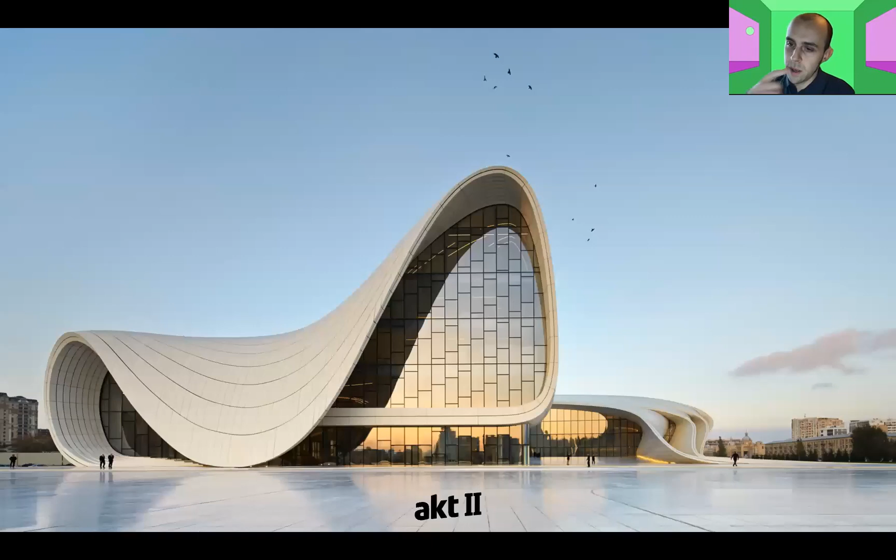Back to me for a few more seconds. I've been very lucky to be at the right place at the right time when I joined AKT II back in 2007, while the studio was designing iconic projects such as Heydar Aliyev Center with Zaha Hadid, and subsequently, for example, the UK Pavilion with Thomas Heatherwick. These are my all-time favorites. And with my team, I've been very privileged to be part of many larger design teams, meeting amazing people, and also learning many skills while delivering truly amazing pieces of engineering.

So the thing that really stuck with me the most while delivering this engineering project was the impact that data knowledge and manipulation can have on the final design. In this conversation tonight, we'll cover a few important lessons I've learned using some of our completed projects and research to hopefully help the discussion.

So the common denominator that unites us tonight is perhaps a shared curiosity on how technology and data are transforming our industry. And hopefully there'll be an interesting debate at the end of the evening, although I wish someone could set up a virtual pub because I really miss the post-lecture drinks and nibbles.

But anyway, technology really has already changed the way in which we move, we interact with people - we've proven it right now more than any other time before. The way in which we eat and we live. And it also changed the way in which we understand the world around us.

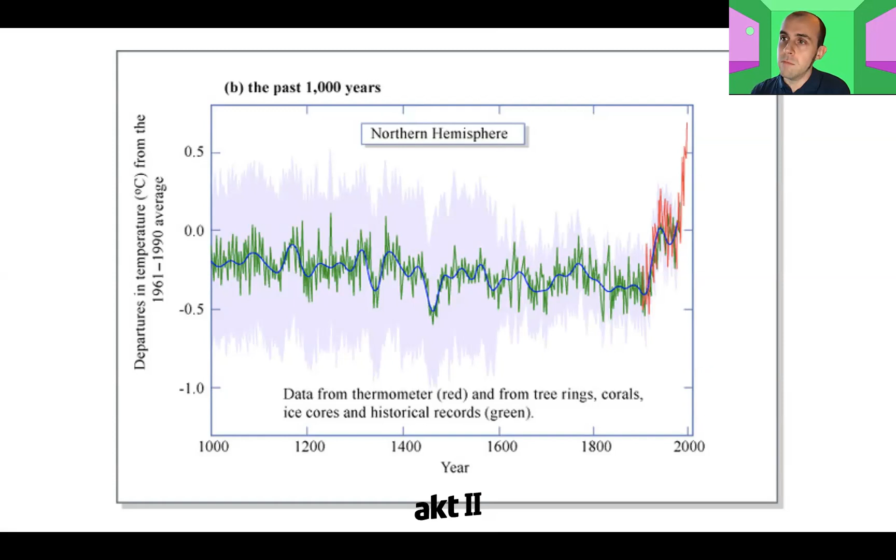Without data, we wouldn't be able to understand the existence of some problems, such as climate change. But also we wouldn't be able to track and potentially adjust some other problems, such as how different countries right now are trying to flatten the curve of confirmed cases of COVID-19.

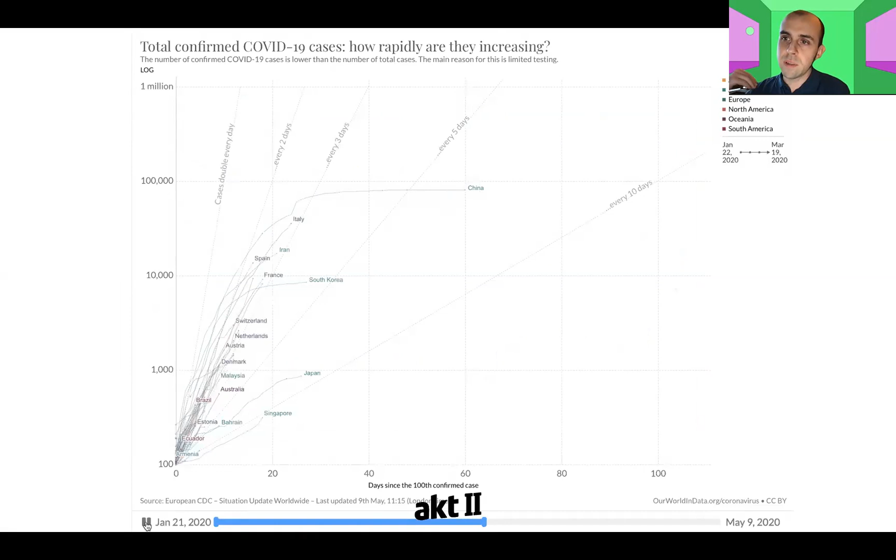So before going through the detail of some examples, I thought let's give a little bit of thought to what generates these shifts in usage of data and how they might impact our industry.

Obviously, under the engineering perspective, the data sets are linked to technology and to computing power. And there are three major laws that actually are ruling technology innovation. The first one is Kryder's Law, which is basically telling that disk drive density, or in small words, storage, doubles every 13 months - so storage increases. Moore's law, perhaps the most famous, tells us that the number of transistors doubles every 2 years, so there's a performance increase every 2 years. And obviously this impacts the time.

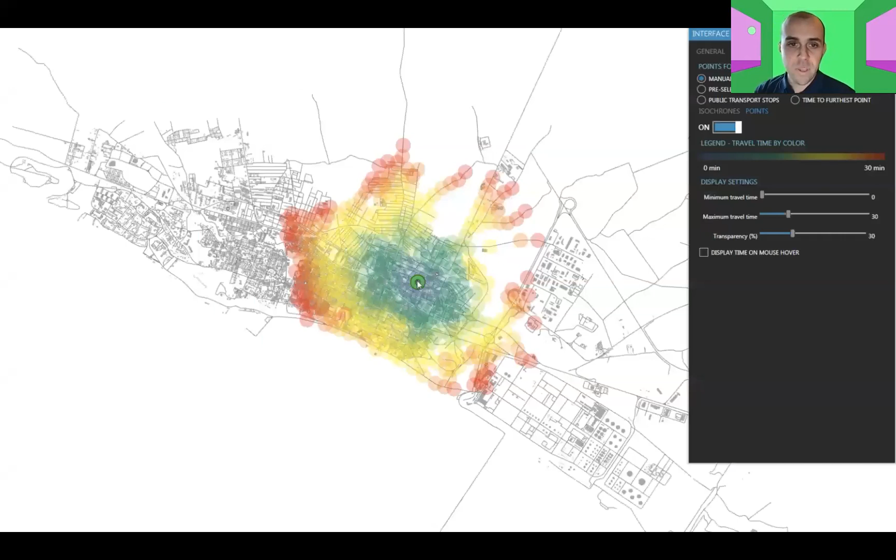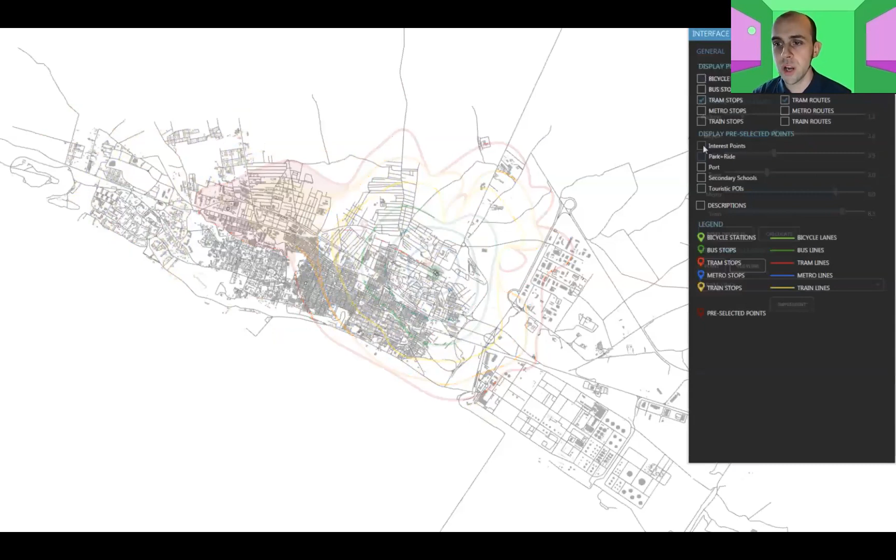They're very much up there, so I took a slide as an example. This is a study done in a city in Sicily. People mapped large data sets of the time for people to go from point A to B, using different means of transportation - walking, bicycle, car sharing, and things like that. They had to compress all this data and plot it on a system that would make use of the actual data set in the background, while also removing bias.

I think this allows us to think a little bit about what skills we might require to do these operations. So we need new skills: software developers, data engineers, gaming developers perhaps, to help us visualize and interact with these data sets. Also, we need new tools: interoperable software, database solutions, cloud storage, and cloud computing.

Large data sets are quite expensive in terms of storage, so it's a bit of an infrastructural change that we might have to face to be able to use these systems at their most.

Challenging, let's say. So the third and one of the most interesting things for me, as I tried to introduce in my initial slide, is bias - how to remove bias. There are many types of bias in statistical and data analysis, but I think one of the most interesting ones is survivorship bias, and there's a funny story to contextualize and explain it.

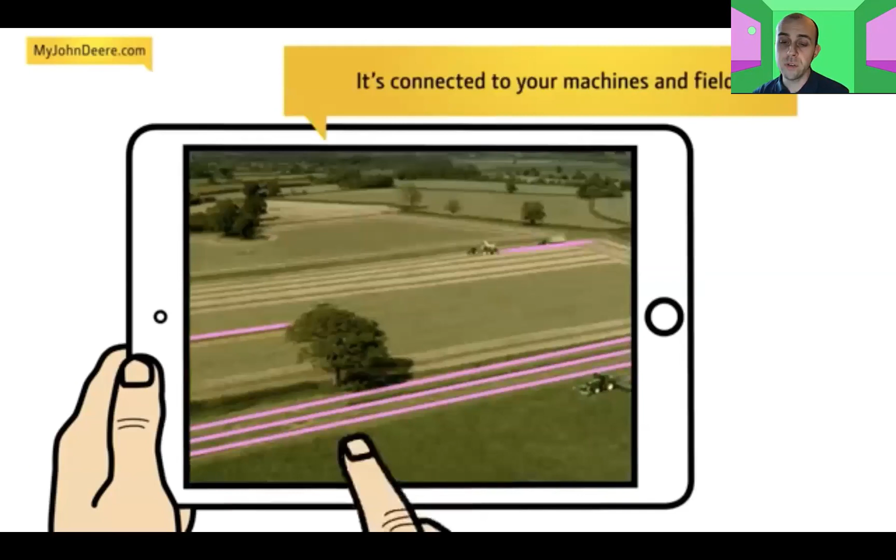So I guess one of the questions we might ask ourselves tonight is, can big data influence our industry? So I thought, first of all, let's have a look at other industries, how big data is already influencing them. For example, agriculture.

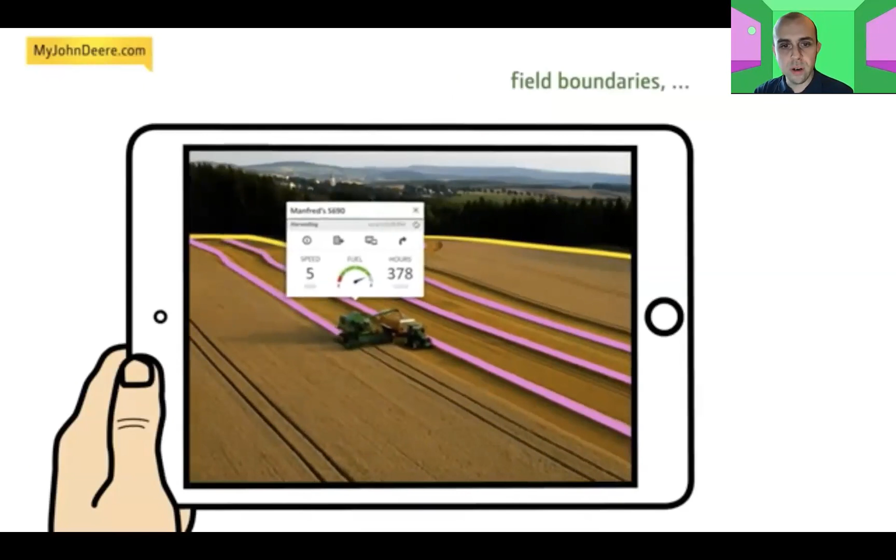There's a large use of data sets and data-driven crop assessment. This is an example from John Deere, applications which allow farmers to look at their crops in real time, looking at their machines in real time, their efficiency, what's going on, what's going wrong. It's all live and interconnected, and it's improving the efficiency of crops.

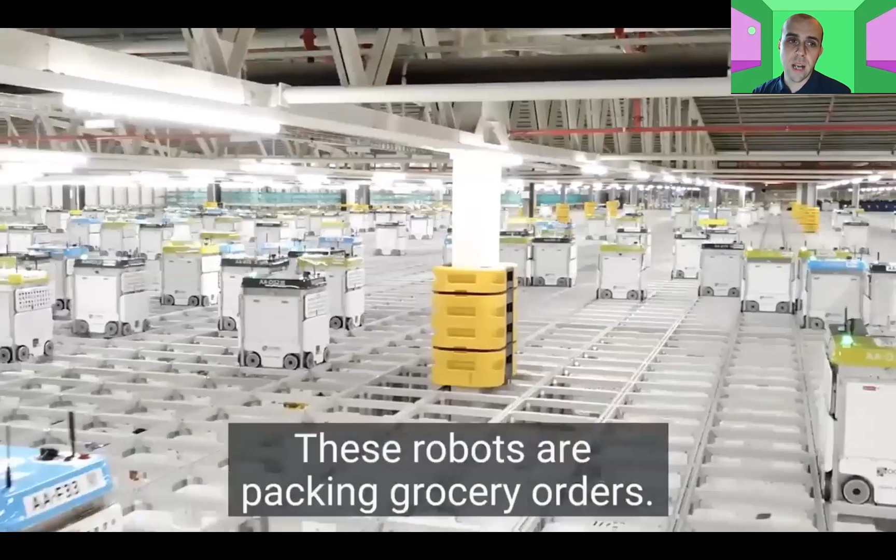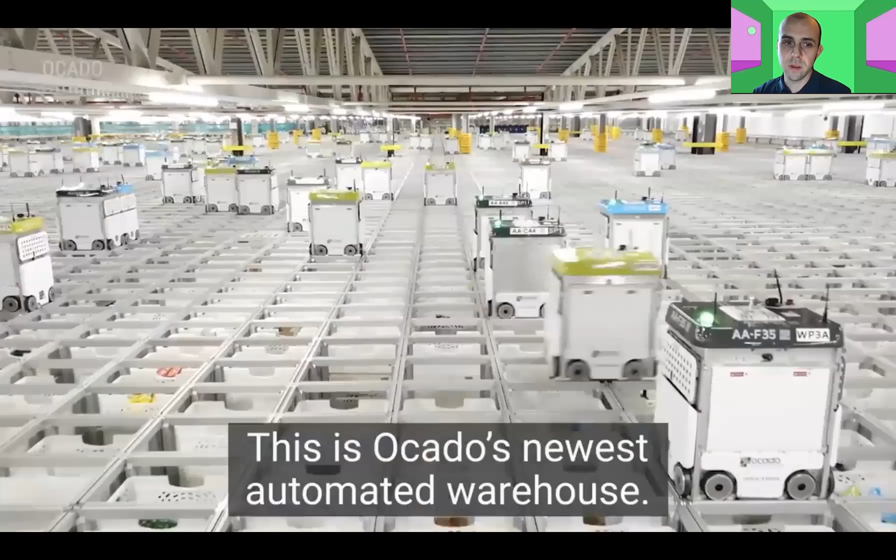Or even in other industries, in the consumer and retail industry, this is Ocado, one of the Ocado terminals for shipment of products. With interconnected, real-time positioned robots, Ocado manages to track their shipments and prepare them by fully automating and using robots instead of humans, which compressed the storage requirements, sped up the time, and has a lot of other benefits.

But for us, being designers, it's not about improving something that is repetitive and trial-and-tested. It's about trying to improve design, which we all know has got so many parameters around it, so many people, so many players. So let's have a look at how data can help us in design.

I'll introduce some of the projects that we've delivered at AKT using these systems, but just to introduce what affects design from our perspective, to me there are five different categories.

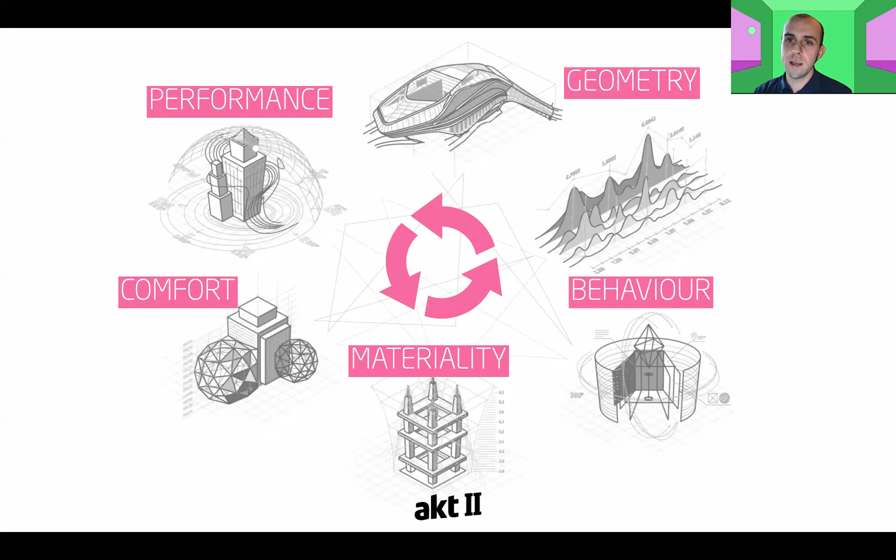So the way in which materiality affects behavior, the way in which behavior then affects geometry, and subsequently geometry affects performance and performance affects comfort. This is like a recursive process throughout the design that we have to try to manipulate and try to get external information into.

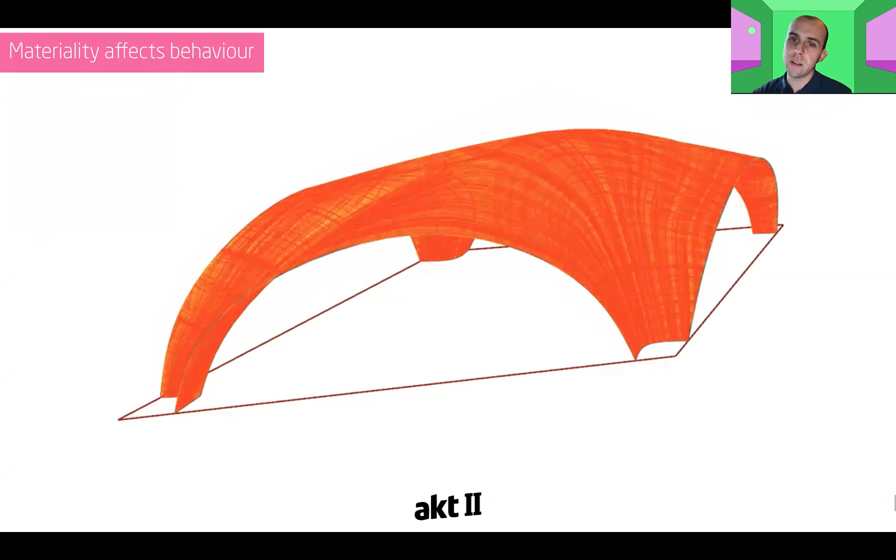The formal research we pushed at AKT in the past few years, applied to many other buildings, consisted in linking, for example, materiality to behavior. In one project we delivered with Zaha, looking at performance of concrete shells, we combined the performance of concrete to the behavior and changing parameters of the shell. We've been able to assess what would be the optimal conformation and the optimal material concentration in the shell.

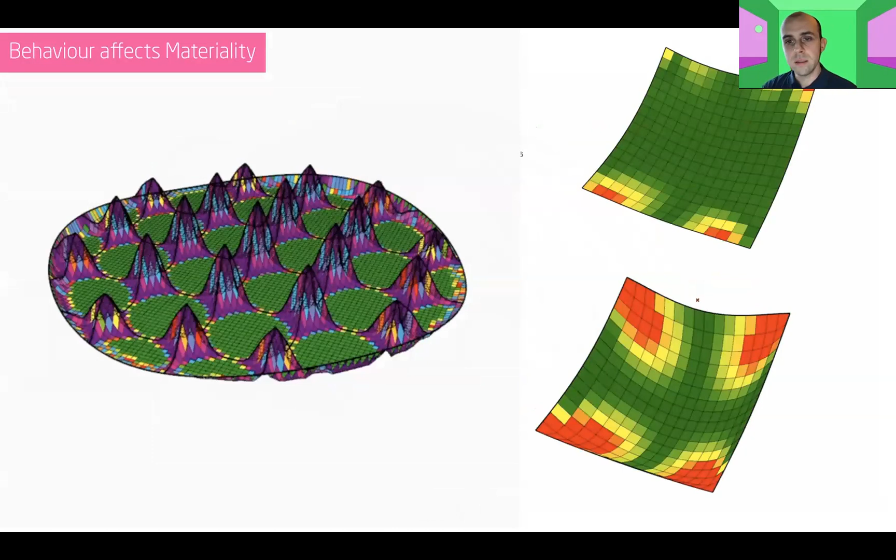But we also link how behavior affects materiality in reverse. In this case, we looked at how seismic actions would impact the glass skin on this large glazed dome, and we could tailor the material and performance to different specifications. We could see that the top seismic action and the bottom are the same, but with different structural parameters, the two structures behave completely differently. Dealing with large data sets here allows us to understand the impact of one action on the other.

But also how behavior affects geometry. This is a project with Bjarke Ingels in Norway, looking at a museum bridge spanning over a river - a very initial study here. We looked at how the behavior, in this case due to the actual position of the supports, affects the geometry.

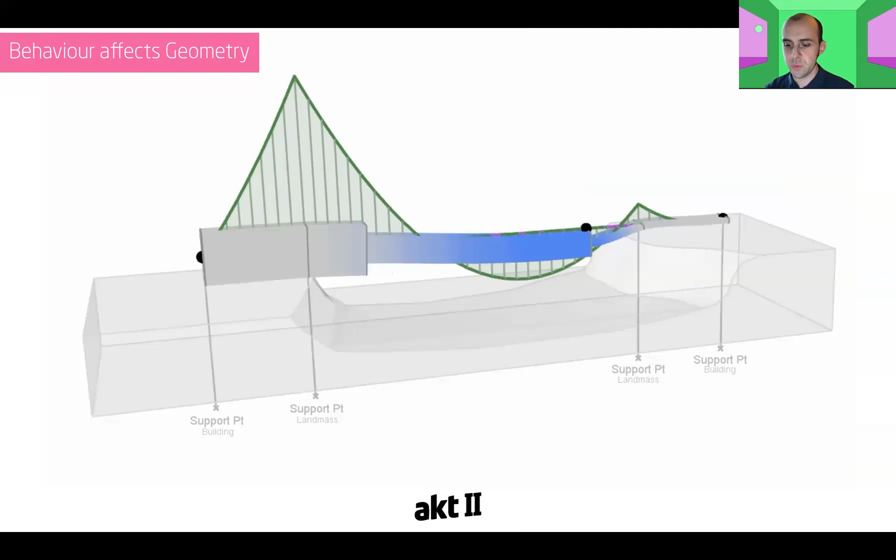And similarly, how geometry affects performance in this study of how varying the outriggers of a tower can help us reduce the displacement and therefore improve the performance of the core.

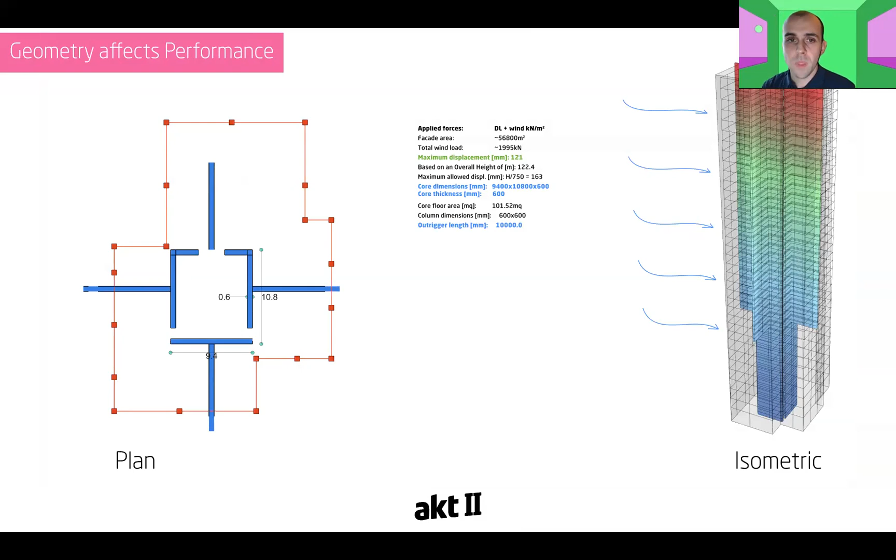Also, performance affects comfort somehow. So we have developed tools, which I will show later on, that allow us to understand the impact of our changes in design on comfort, which is also one of the aspects that we're trying to maximize in our designs usually.

So very quickly spending a couple of words on research - usually research is an exercise that looks at the past, where you're looking at understanding a specific problem through analysis. You start from a hypothesis and go through historical data to converge to a solution.

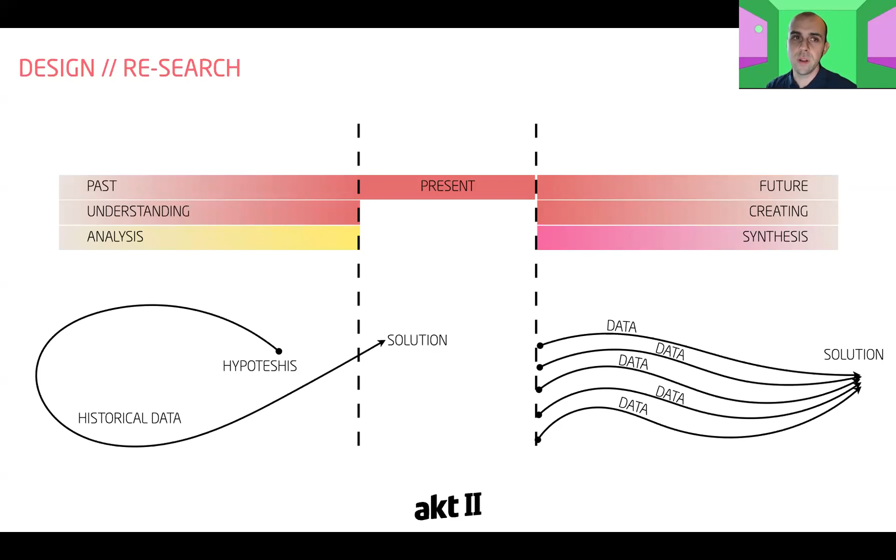But also look at the future - that's where the creative side comes in, being able to synthesize current data sets and create a solution that hasn't been solved or written before. The combination of those two things is what excites us at AKT, and especially in my team, the research we're pushing forward spans many different disciplines.

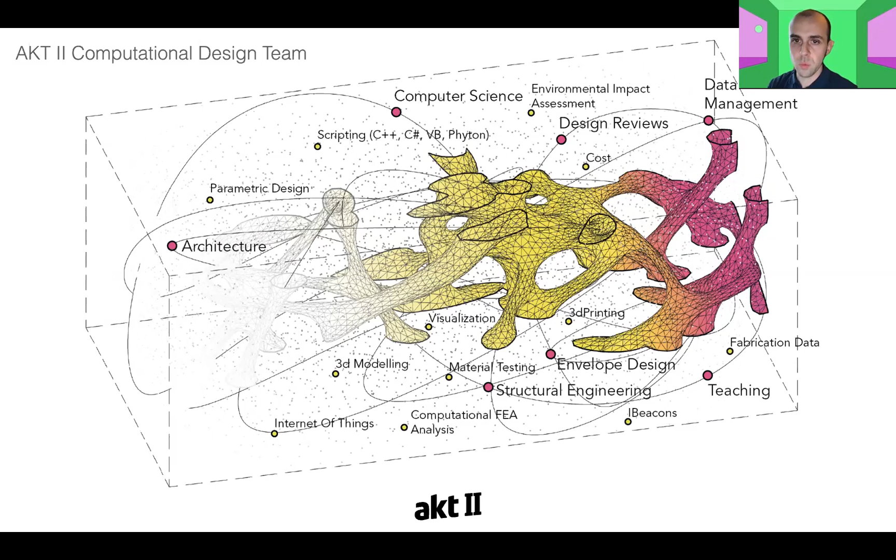Therefore we focus on computation methods applied to design, and look at developing interoperable tools that connect architecture, engineering, environmental design, and fabrication, because we obviously cannot do this on our own, and lots of the parameters we're willing to change reside in other realms, so we need to work together.

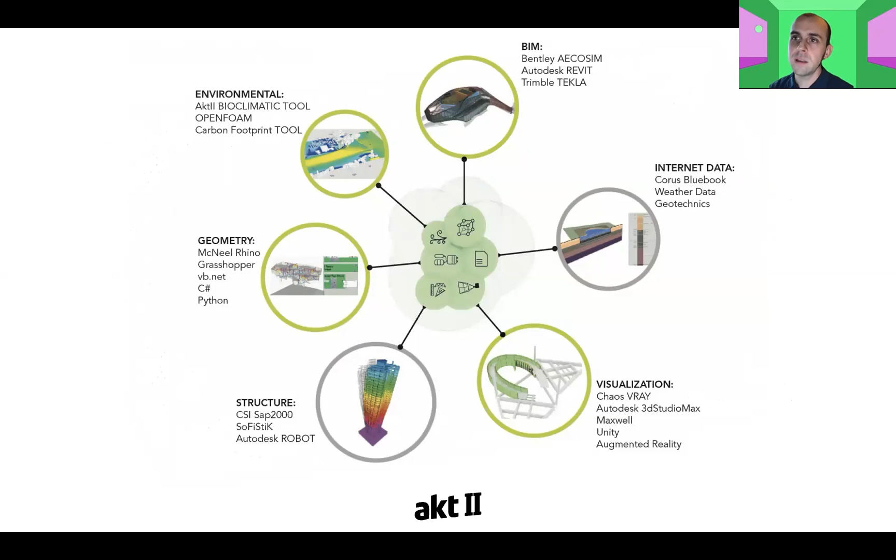To that respect, we've been spending time developing an internal workflow that allows us to connect the different software we use throughout the design, to facilitate this process - not to spend too much time dealing with modeling and getting the right parameters in the models, but actually to focus on design, which is most important to us.

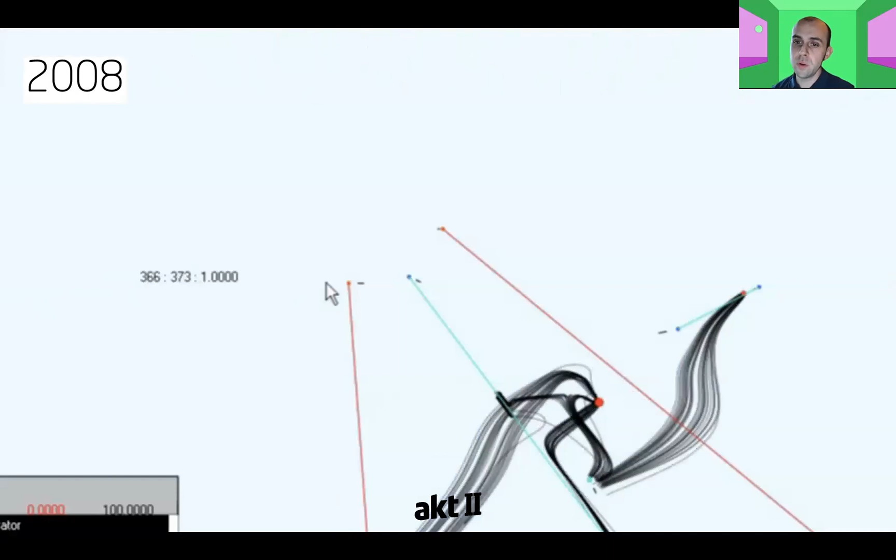We've been pioneering this approach early on, in 2008, where we were already looking at, for example, designing footbridges. This is a competition for a footbridge in Farringdon, where we used people flow to define the width and depth of the bridge - predicting how many people would actually go on the bridge to then specify the actual geometrical and structural parameters.

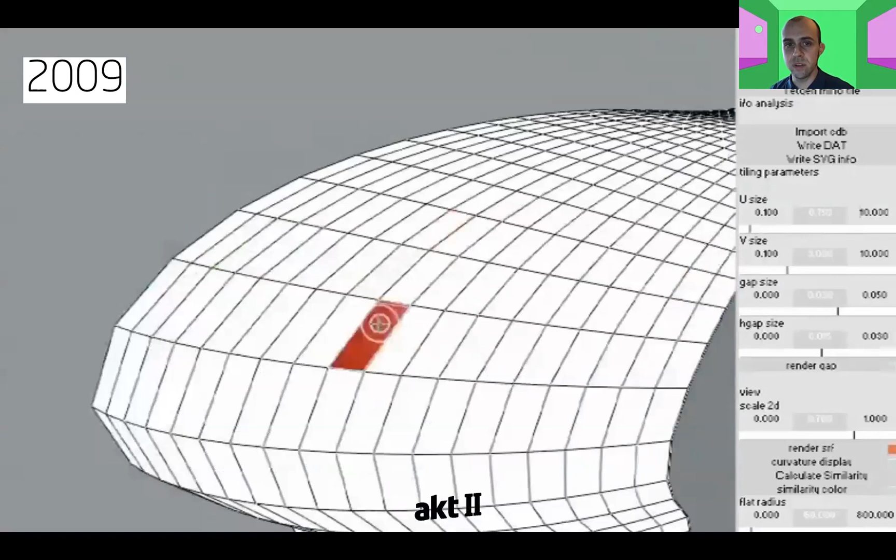So we had to manipulate this data and try to understand a lot more from it. We scripted this internal solution to extract the information from the data that we had available.

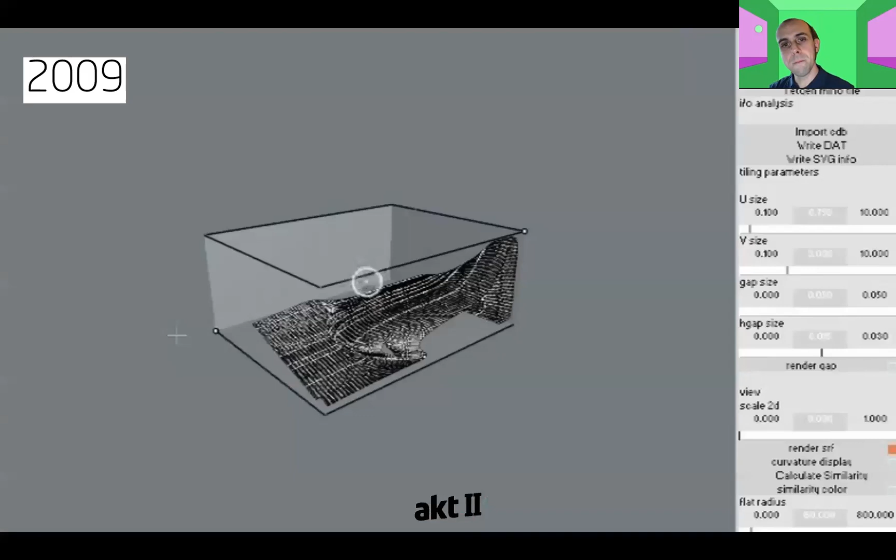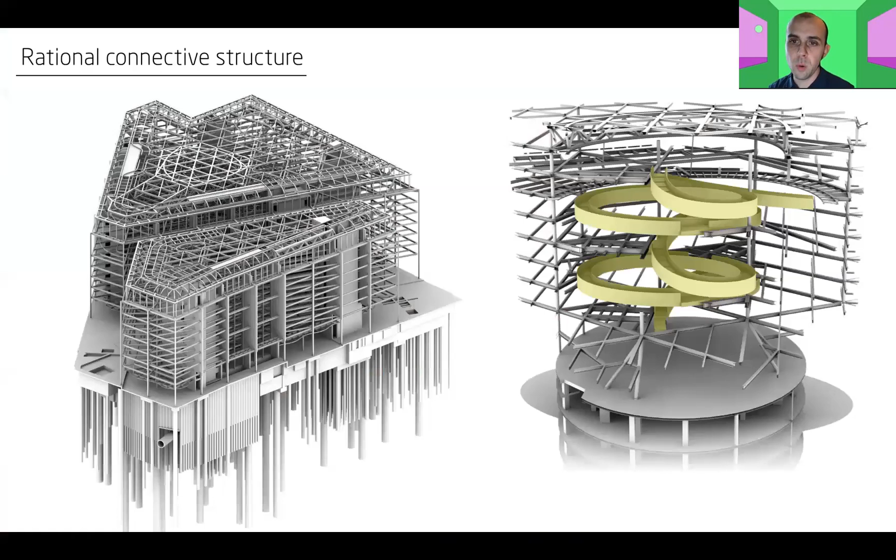A lot of it's about geometry. I took a small example from Bloomberg headquarters, not the whole project, but essentially the central part, the main architectural ramp, because this was a very early example of how we connected different data sets and parameters, and how we worked together with the architectural studio to drive the design process.

The whole ramp is based on one mathematical function called a hypotrochoid curve. We used this function in our software to generate the actual model of the ramp, so we could manipulate it as we went along, as the design changed. Being able to manipulate that geometry was essential for us to respond to the changes in the design.

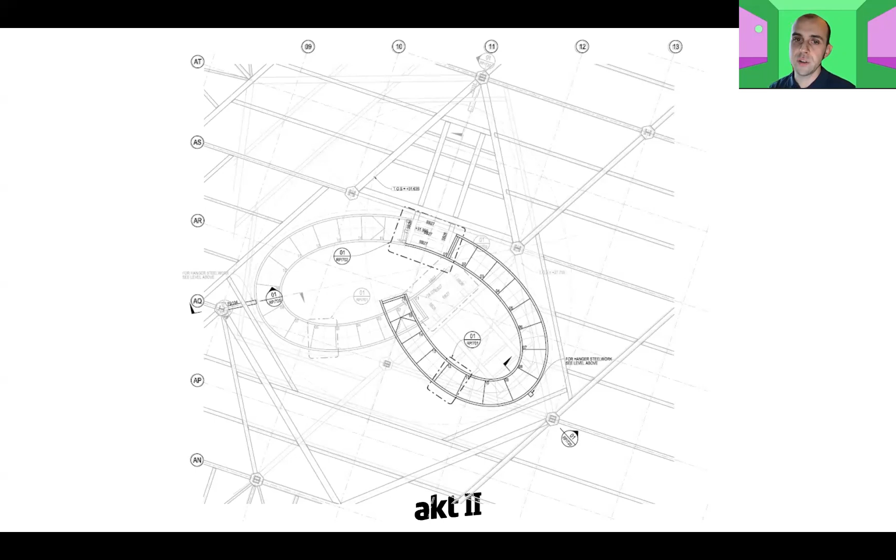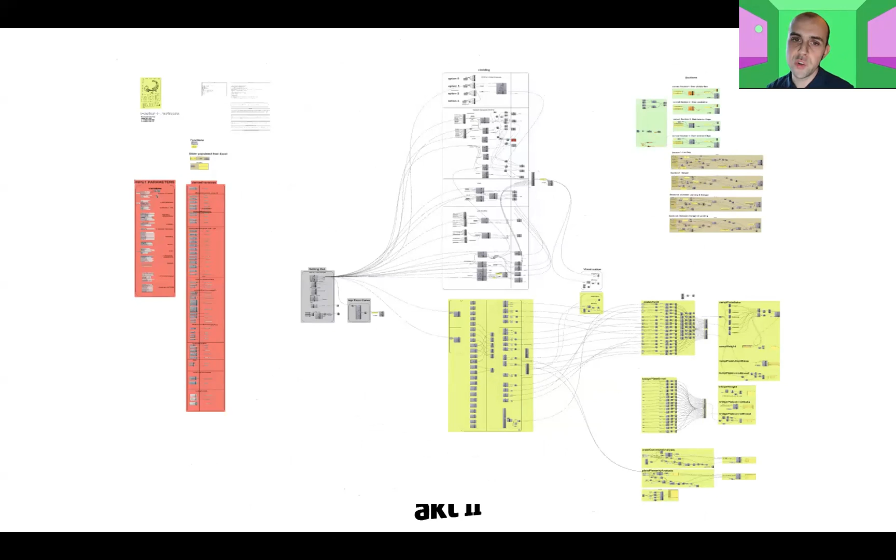The ramp is actually connected at only 3 points, which made it quite lively, so the biggest engineering problem was vibration. This is where we really realized the power of data for the first time. By extracting all these parameters and working together with the architects as they changed the design, we managed to extract the vibration plots very quickly out of the very complex model.

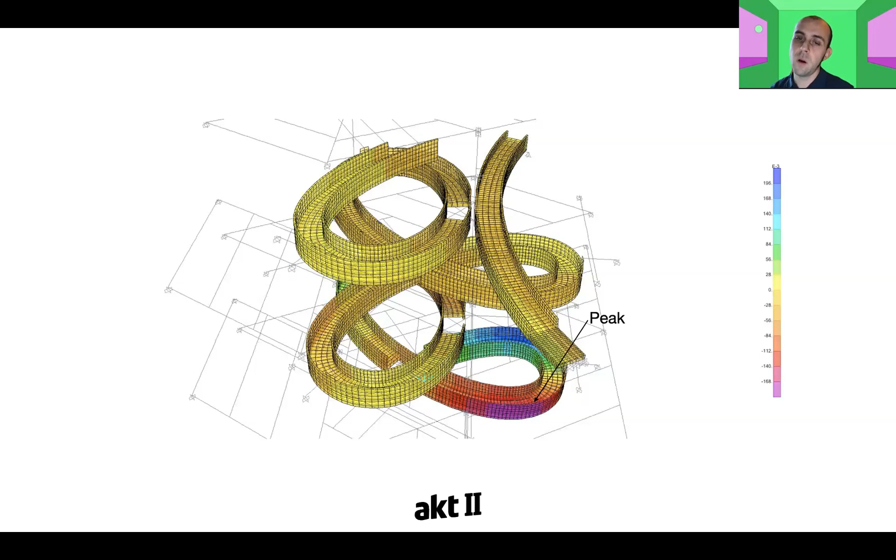We realized a very interesting behavior we'd never experienced before in staircases: the impact of a person walking on the top flight caused a peak of vibration in one of the bottom areas, which we wouldn't normally expect in this type of structure. We were able to highlight this only by running very large data sets and visualizing back the impact of that data on the actual structure.

So I thought it was a very relevant example of how data can actually help us design in a better way, by understanding the problem a lot more.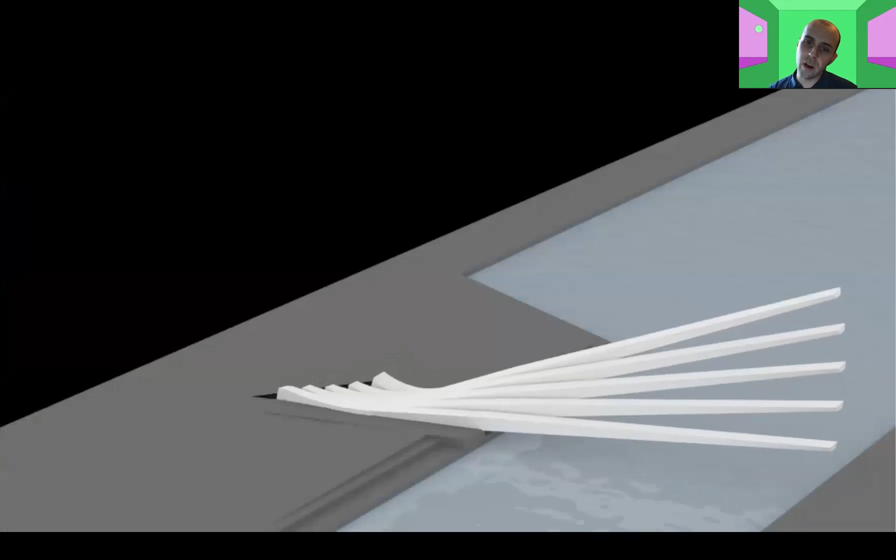Another example is Merchant Square Bridge with Knight Architects in Paddington. This was very interesting because, although it's a relatively small footbridge, it's a movable structure with some dynamic associated to it—there are 5 fins opening and closing to allow barges to pass through. Quite nice and elegant, and the ambition was to keep this ratio of very slender fins.

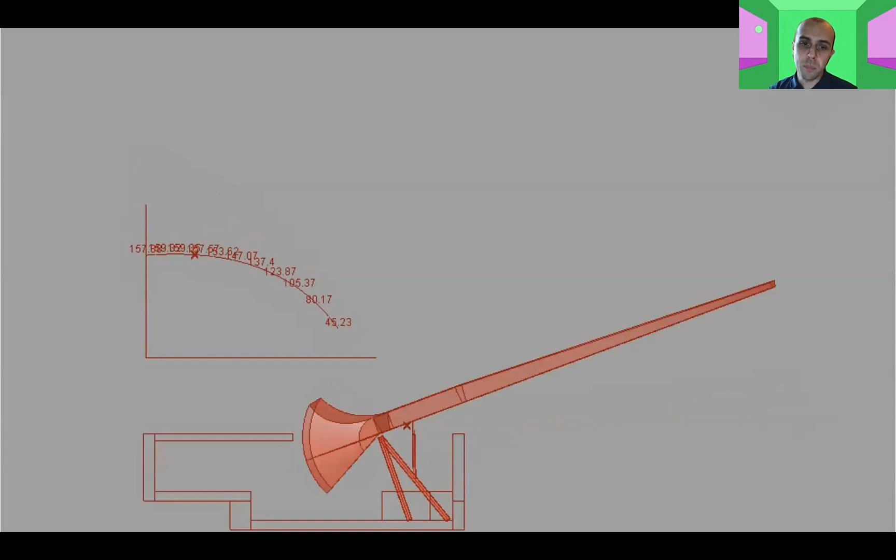The challenge was to define an optimal combination of different parameters, such as the position of the piston, the position of the pivot of the bridge, and the size of the counterweight, so we could use very small equipment to fit within the mechanical area while still complying with the loading criteria, especially in the movement configuration. So we ran quite a lot of models to see the impact of varying these.

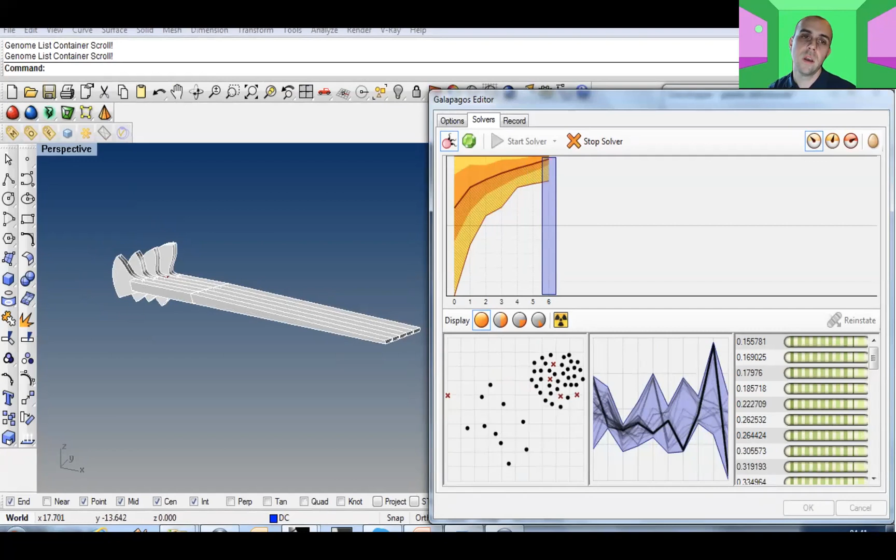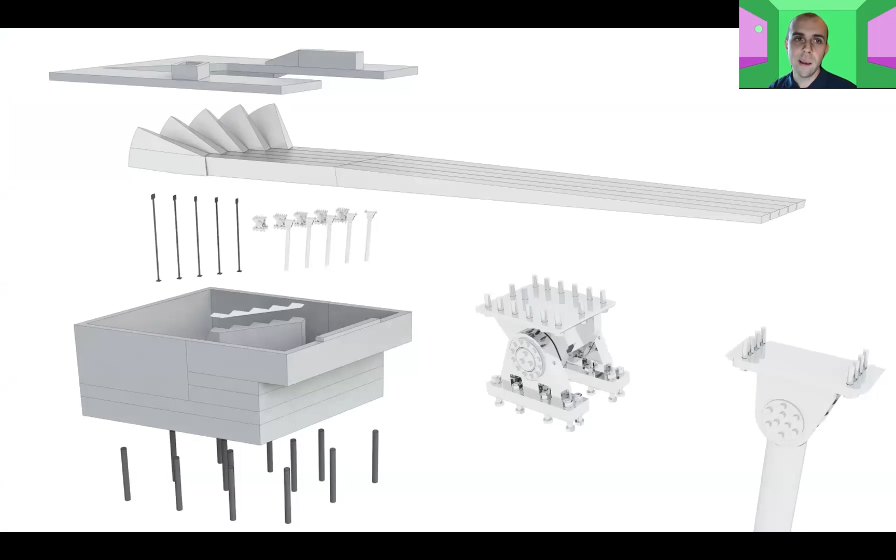We varied the counterweight, the position of the piston, and the pivot, trying to interlink all these different parameters and extract the data that was important for us, which was the balance of all the loadings. So again, this is another example of how tapping into different data sets can allow us to modify our design to comply with the design parameters.

These are a couple more shots of the bridge.

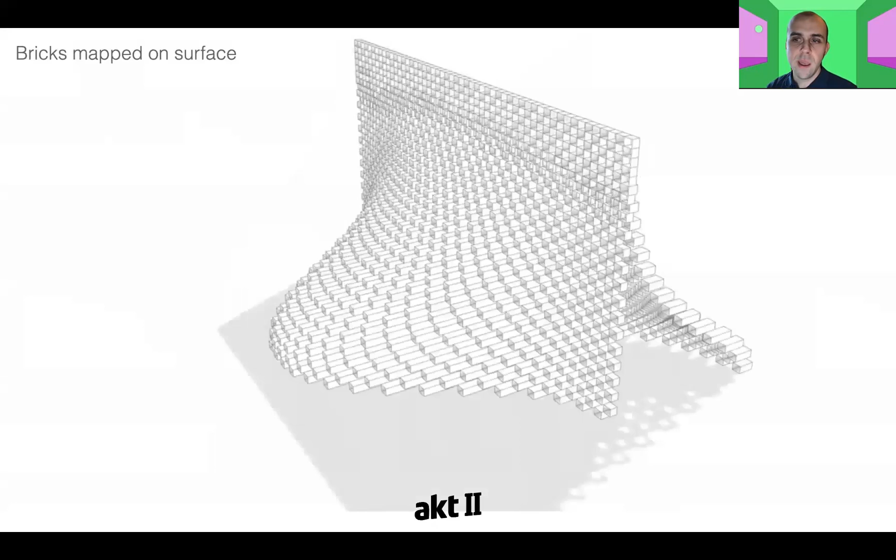Another interesting one to me was the Serpentine, because it opened up a different level of data assessment. The Serpentine, if you've seen it, was based on a very simple generation of the surface. The bricks confining the structure were mapped onto the surface, giving a very regular distribution of geometries.

The interesting part is that the whole process was driven by one algorithm we set up together with Bjarke Ingels architects. This allowed us to maintain the very strict time requirements of the competition, but also to understand the impact of using a material never used at this scale on the fabrication. We had very limited time to assess the GFRP material that defined the boxes.

We had to get some of the boxes tested outside at the university and remap the results of those tests back into our models to verify the design.

The whole algorithm was built to do this exercise, where on the left, the geometry was controlled by Bjarke Ingels architects, and in the middle we were creating, through different iterations, the different global and local models we needed for the design of the structure.

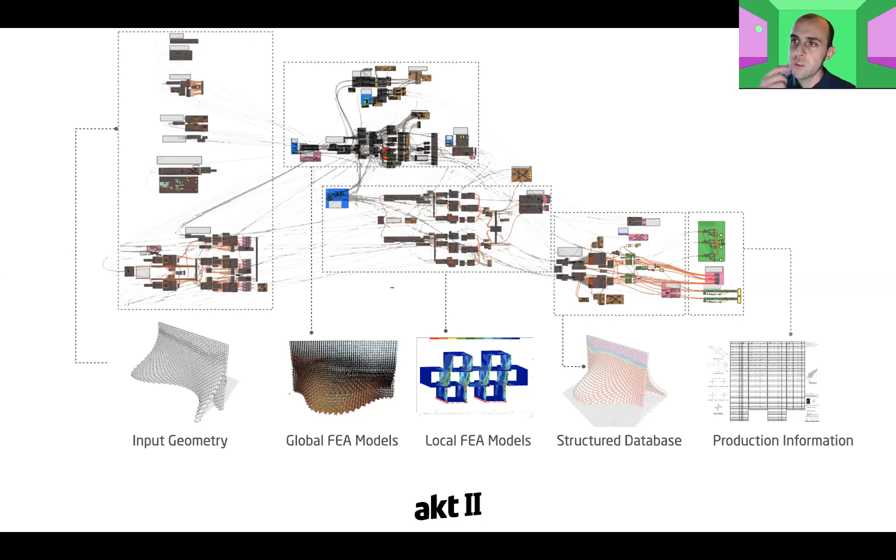On the right, we're compressing all these results into the production phase for the BIM modeling. We've been able to constantly vary the geometry and understand where the distribution of forces would be carried by the different connections, then quickly communicate in real time the areas or boxes that had some connection failing.

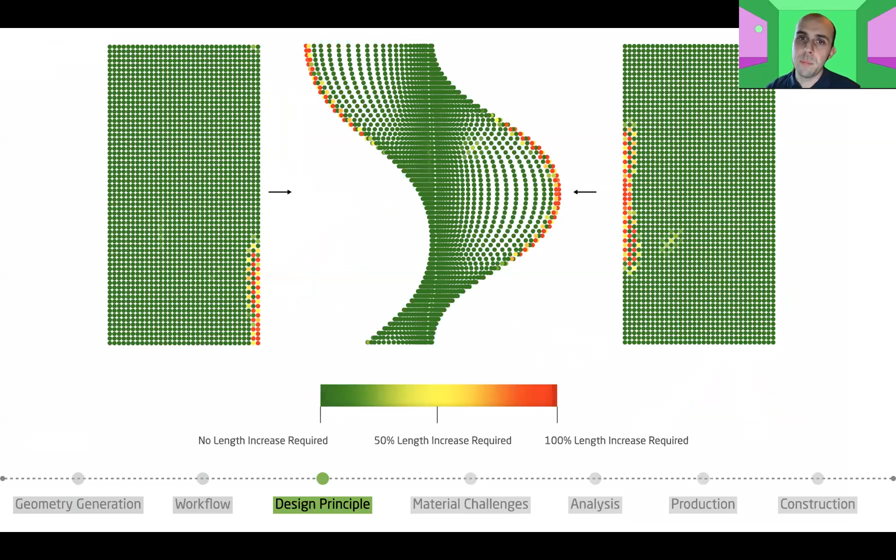This allowed the design team to reassess the geometry. The second benefit was also being able to study the behavior at two different scales and to validate the design, which came back from the results of the tests at the university.

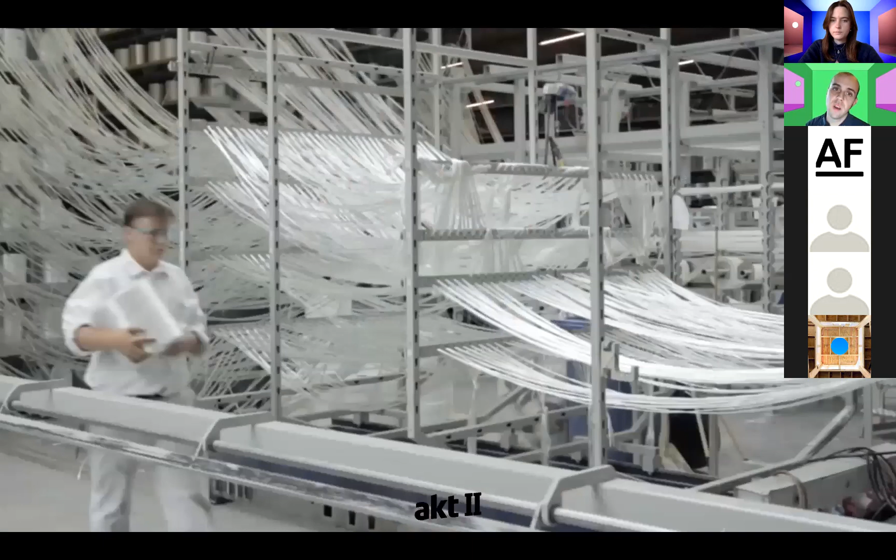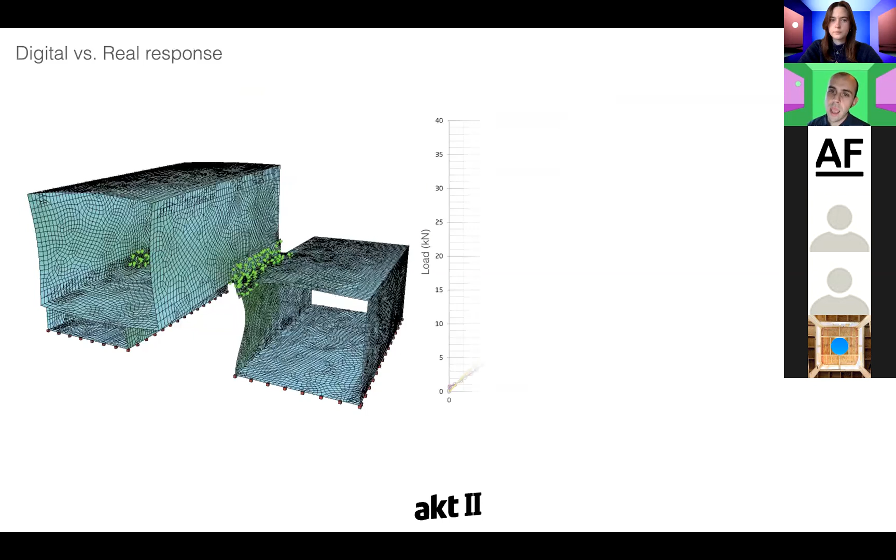The results of the tests were used to calibrate our structural models. When we compared what we were predicting in our analytical model against how the real test was performing, we had a moment of reassurance where our data was verified, so we could progress with the design. This was mainly to prove that this material could be used at that scale, to show the authorities who were questioning us whether that was safe.

And obviously, not having been codified before, we had to go down this route, producing a lot more proof, let's say, in that sense.

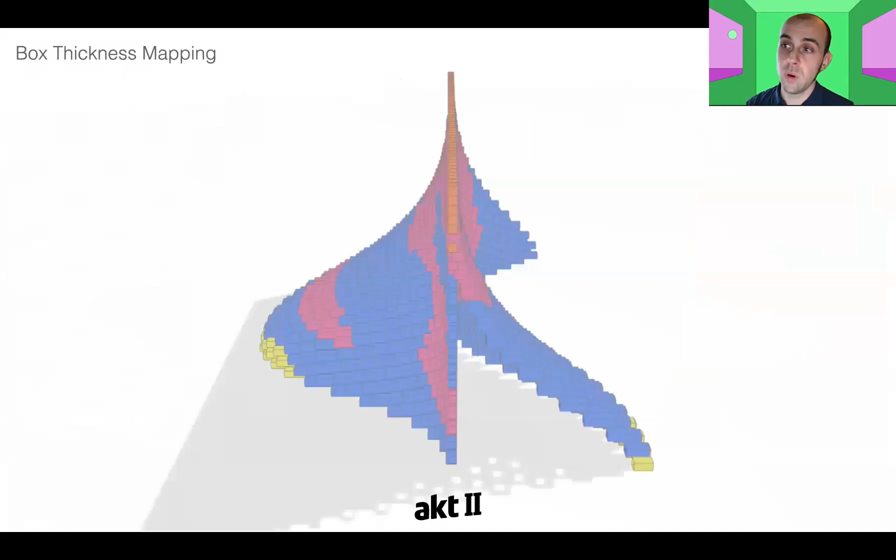But definitely, having this approach of open-sourceness allowed us to communicate back and forth with the architectural team about the different performances of the different solutions, and try a lot more options on the design side.

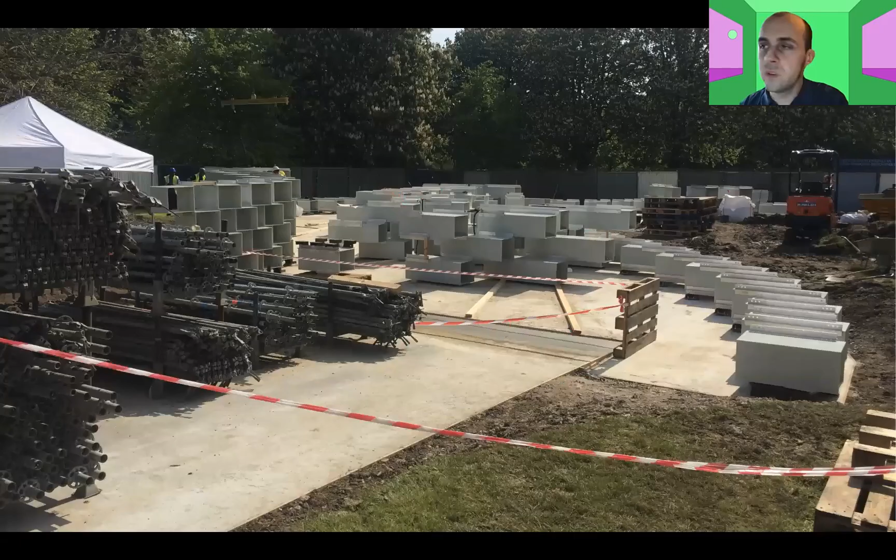So these are some shots of it while it was being built and assembled, back in 2016.

The other aspect obviously is performance. In our industry, big data has already influenced progress in advancing materiality and performance. But one of the best things we're discovering is the ability to use real-life, real-time sensors to assess performance, which takes us to the next step of designing not with code, but with design based on performance.

We partnered in research with the University of Bristol, Mace, and another company called Gas Dynamics to use live sensors to assess the performance of the real building, and to see if the predictive models we used during the design phase could be corroborated in real life.

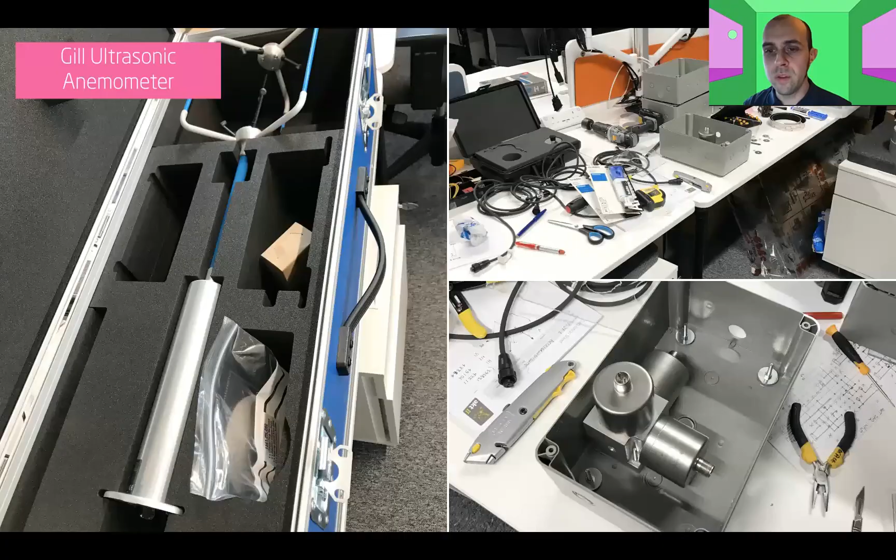So we went and purchased our own sensors - anemometers to look at direction and speed of winds, and accelerometers to understand the impact on the response spectrum of the tower.

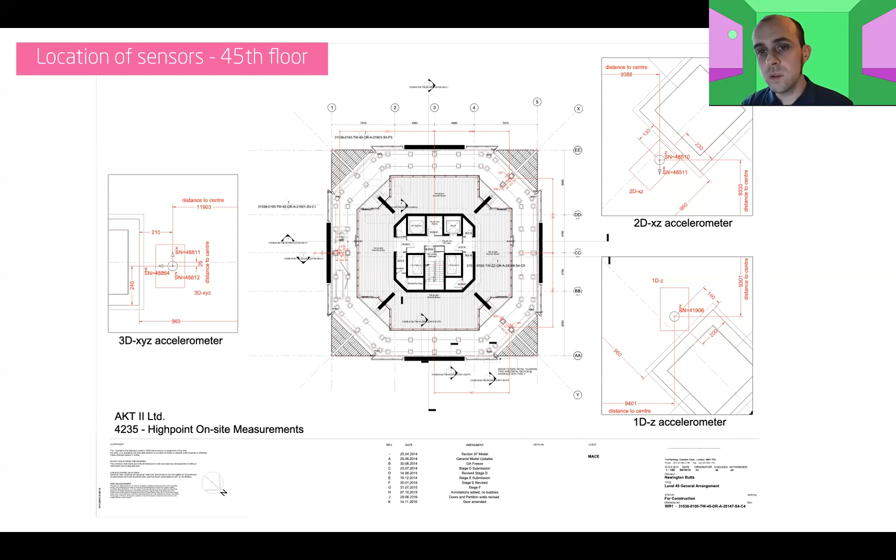We installed them on several stories of the tower and let them capture data for about six months. We are now post-processing the data, and will compare it to the analytical models to understand the impact of simulated versus real-life performance, in the hope that this will allow us to have a different set of parameters while designing.

I think this is the most exciting part of our work and research - being able to really understand how the structure behaves in real life.

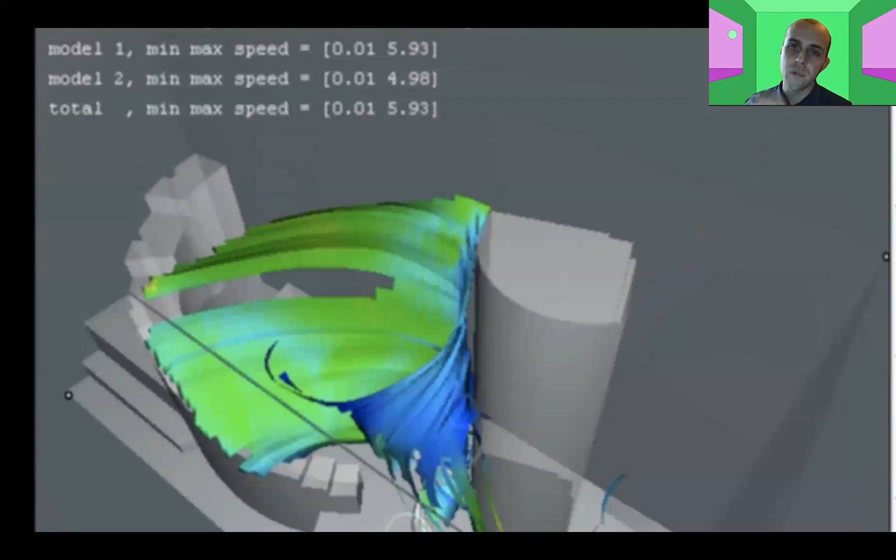Another important side of it, interlinked with all this, is comfort. We started looking at comfort several years ago. This was a shopping mall in Turkey, badly affected by wind that got trapped and captured by a recently built high-rise, and was projected into the atrium of the shopping center, creating a lot of discomfort for visitors.

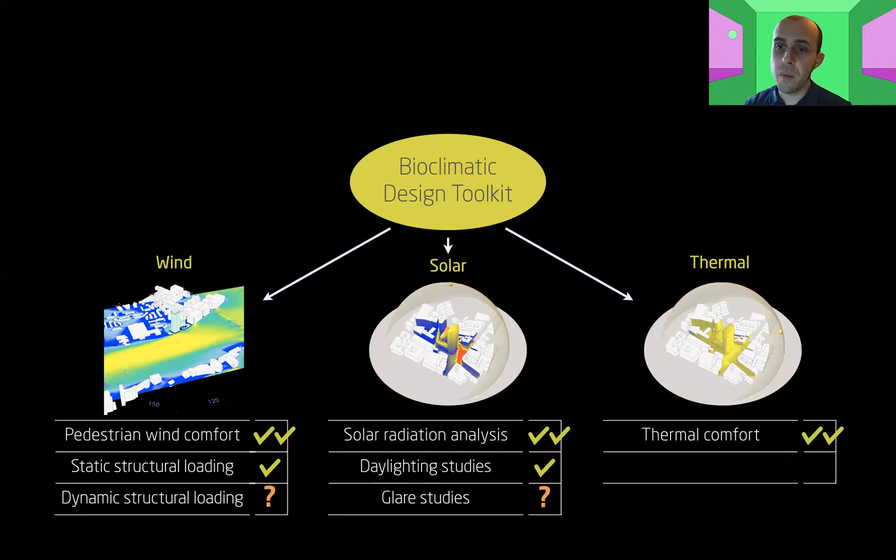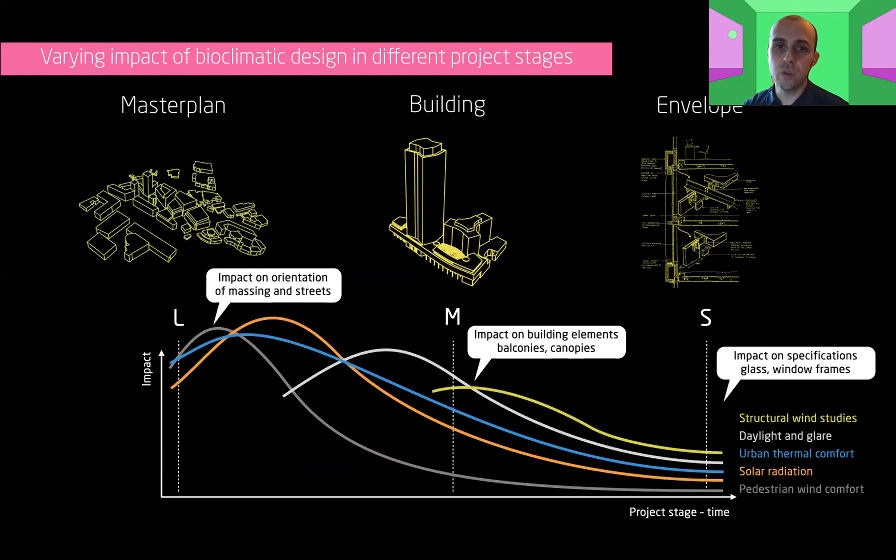This pushed us to develop a toolkit to assess comfort, not only from the perspective of wind, but also under the lens of solar and thermal comfort, so we can inject it into our design at a very early stage, and later stages too, with different parameters that let us understand the behavior of our designs in more depth, at different scales - from master plan to building to envelope. I think it's really important to look at these features while we're designing.

So we actually created an automatic sort of system that allows us to assess wind speeds and then get the impact of those onto the comfort levels at pedestrian level.

So in order to facilitate the design phases and to have an influence, for example, on the massing or on the orientation of our designs.

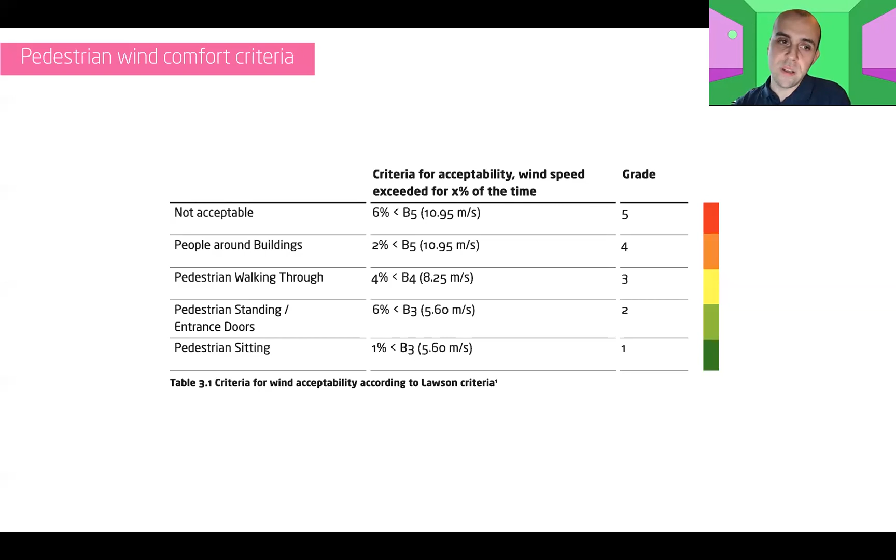This data set, which is very large, gets mapped and post-processed to understand the effect on wind comfort. There's a recognized scale that allows us to understand if some areas are within acceptable criteria versus not acceptable.

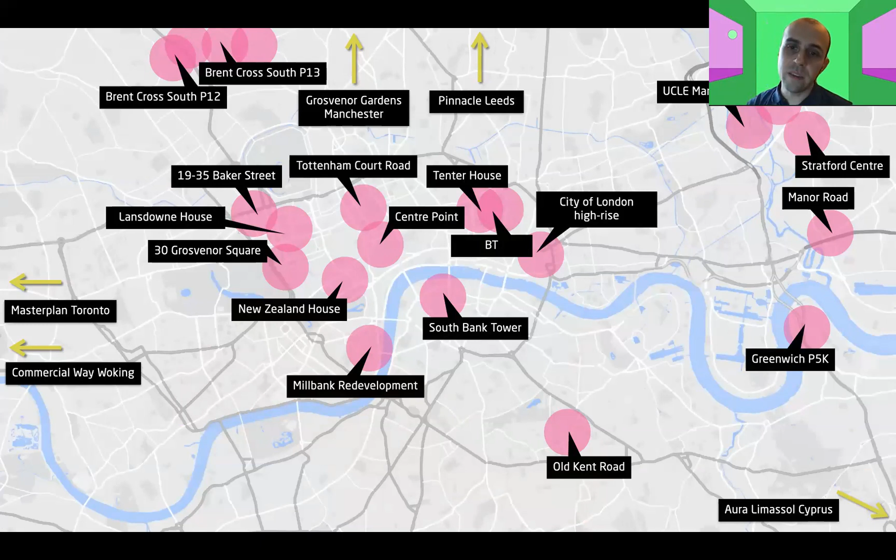One of the examples that summarizes all these different approaches is the Tide, with Neiheiser Argyros and Diller Scofidio + Renfro in the Greenwich Peninsula, where we combine all these different capabilities: the ability of manipulating geometry, understanding different manipulations of the geometry, the impact on the structure, the impact on performance, and the comfort generated by wind.

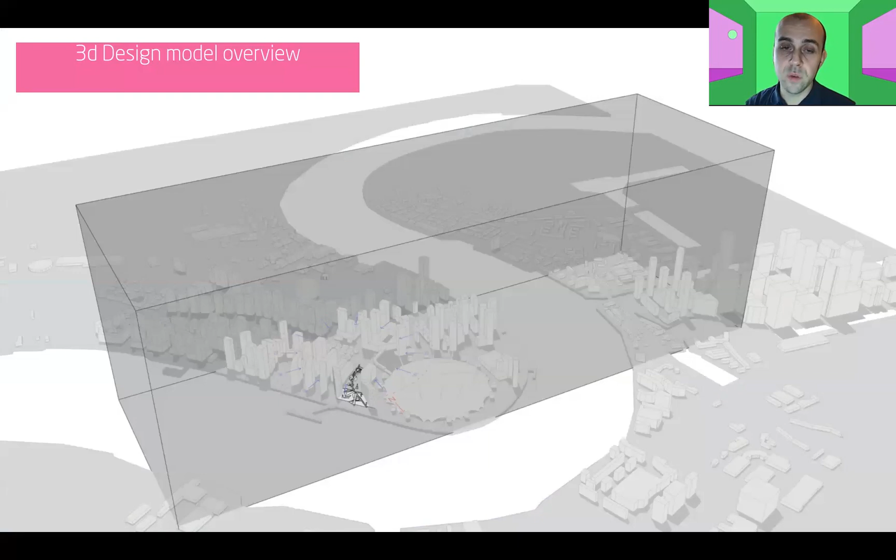In this case, we set up a very interesting series of models that allows us to understand the changes in the proposed scheme, also in the context of looking at the future master plan, and the impact of some changes we would have to do, the impact on comfort, but also understanding how geometry will impact performance.

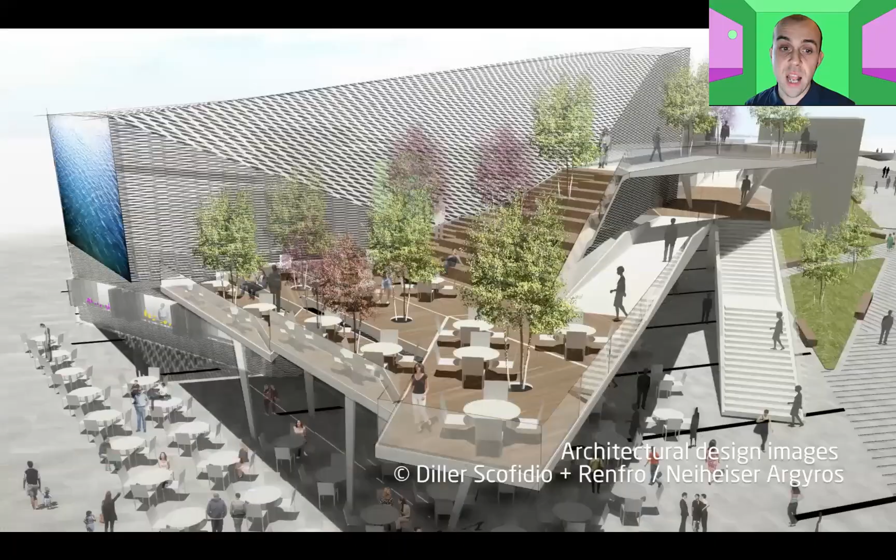In this case, those bridges are very slender, and to maintain the slenderness, it was not enough to come up with a structural system that was stiff enough to avoid large vibrations.

So we had to study the structure a bit more in depth, breaking down the fabrication parts in order for us to manipulate the material where it was mostly needed, but also understand the performance criteria we were designing into.

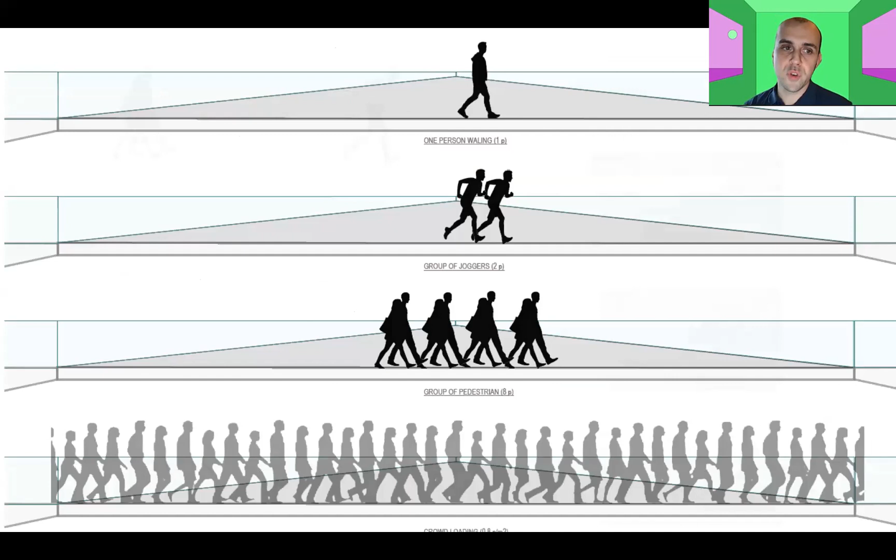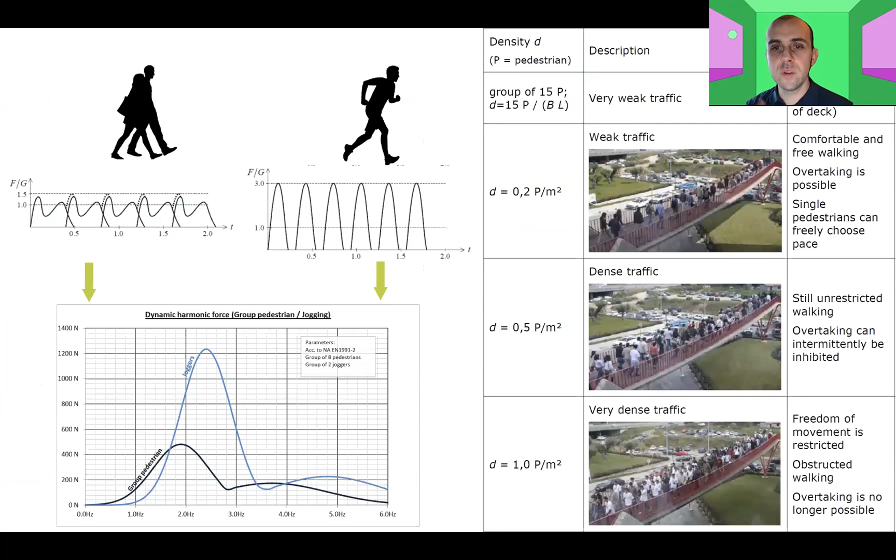By running a lot more detailed models that captured the impact of different paces, different configurations of people walking on the walkway, we were able to extract all these data sets, map them onto the geometry, and understand how people moving across the walkway was impacting vibration.

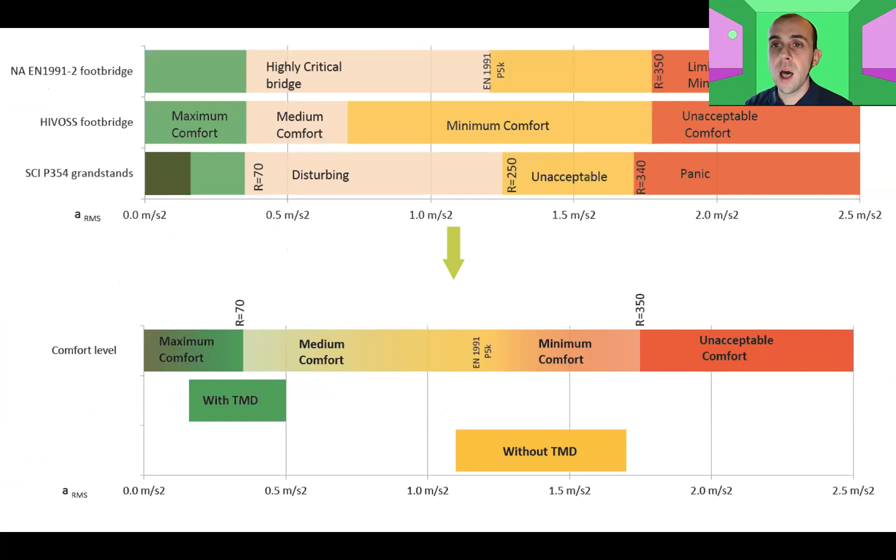We soon realized that to keep the geometry quite slender, we had to rely on additional measures outside the actual material. So we implemented a system called tuned mass damper, which is basically a weight on a series of springs that counteracts the impact of people walking or running onto the structure, and therefore limits the vibration of the structure.

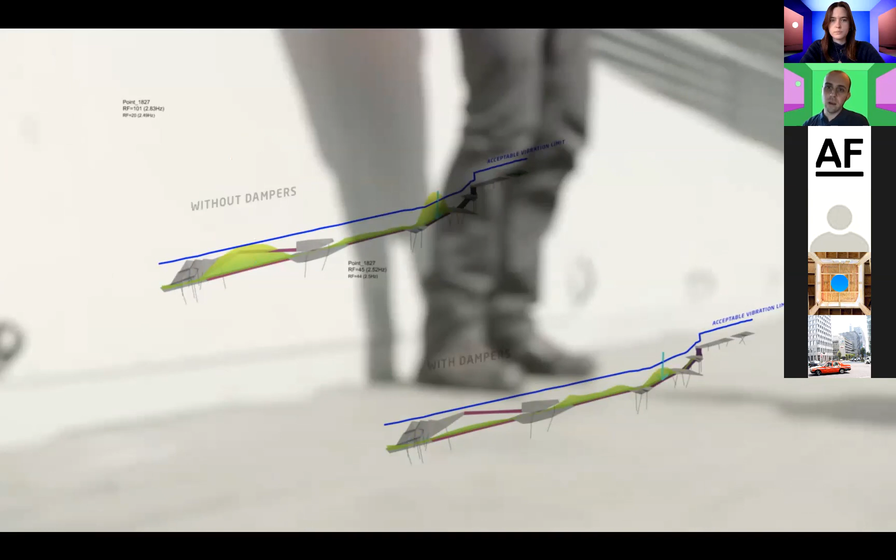So basically interlinking all these parameters together allows us to really push the boundaries in terms of design, maintaining the aspiration of the architects and the slenderness of the structure. This was all enabled by having access to large performance data sets and combining them together, trying to find lines of understanding throughout those.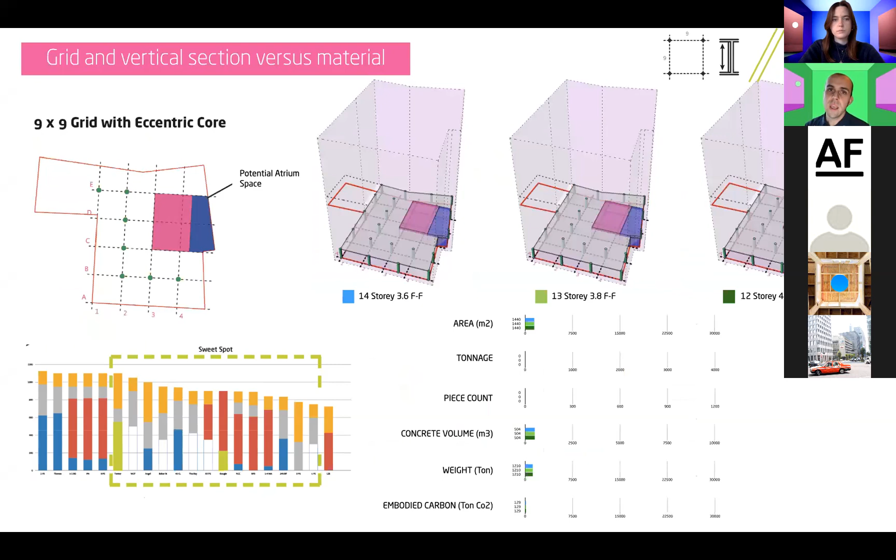For example, the ability of understanding, in different projects, how our floor sandwich compares, or how manipulating grids on areas or materials impacts our buildings.

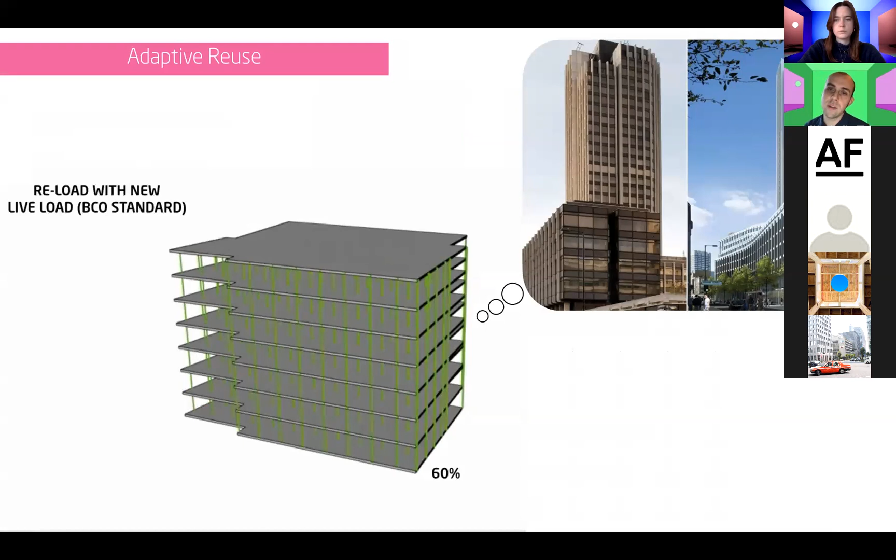Or more interestingly, understanding in terms of reuse how buildings were built, and can we actually reuse some of the resiliency in those buildings due to the fact that the loading criteria have changed, so we have much lighter requirements. Can we use this power to look at how, without drastically changing the context of our buildings, we can reuse some of the structure? Can we add floors? What's the impact of adding different materials or different loading on top of these existing buildings? Definitely a useful thing to do.

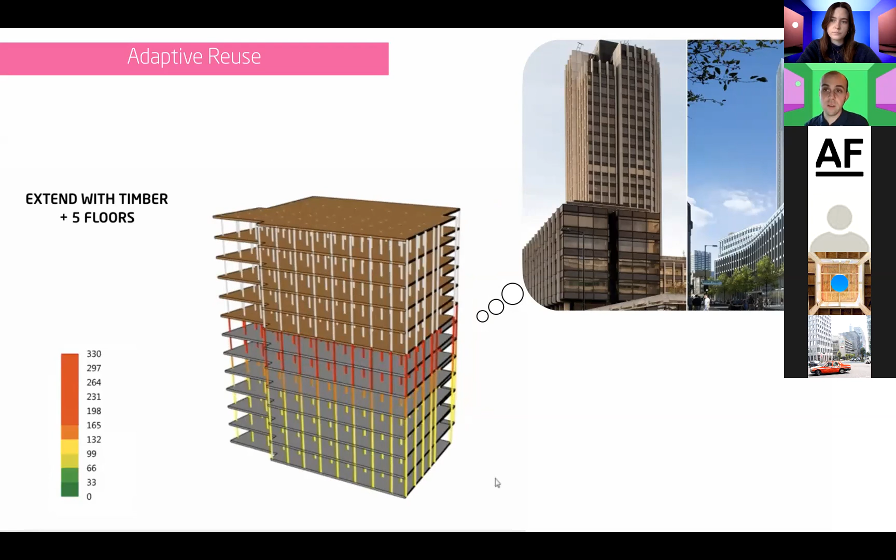Very quickly, last five minutes on current research.

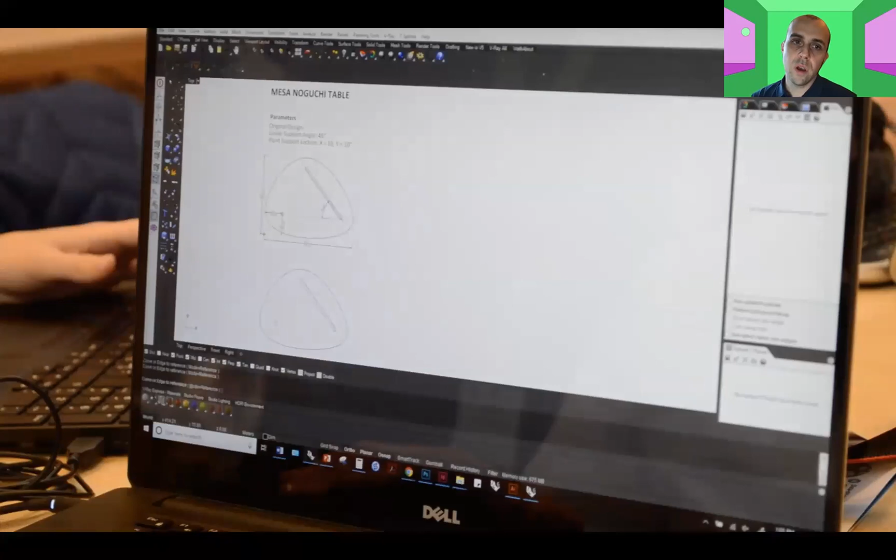In terms of data-driven design, we are looking at the next level. This research looked at how we could use algorithmic design and robotic fabrication to let the computer design its own structure.

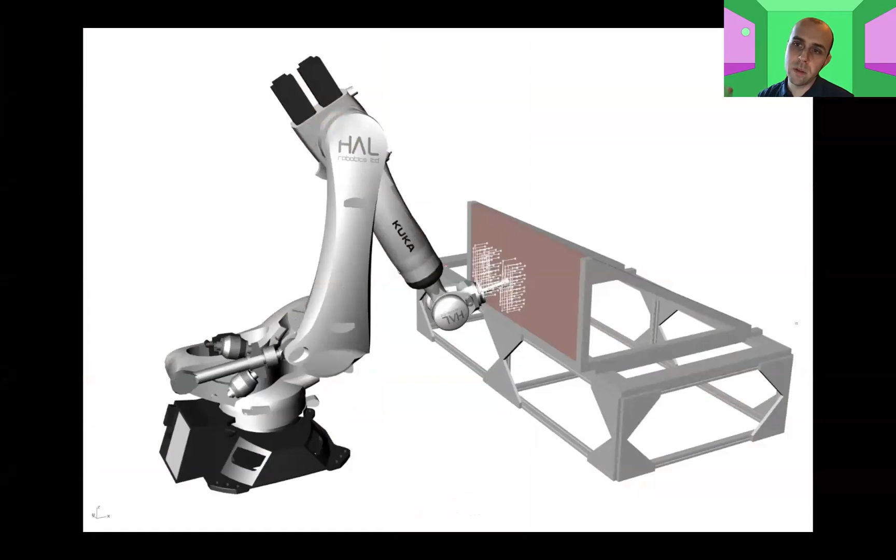We looked at a very simple floor plate where the algorithm only assesses the design to understand where the loads are going and where the impacts of the load are going. This data is sent to the robot, which translates a deflection parameter—how much the structure is moving—into a carving movement. If the structure moves too much, the carving is less. If the structure moves little, the robot carves more.

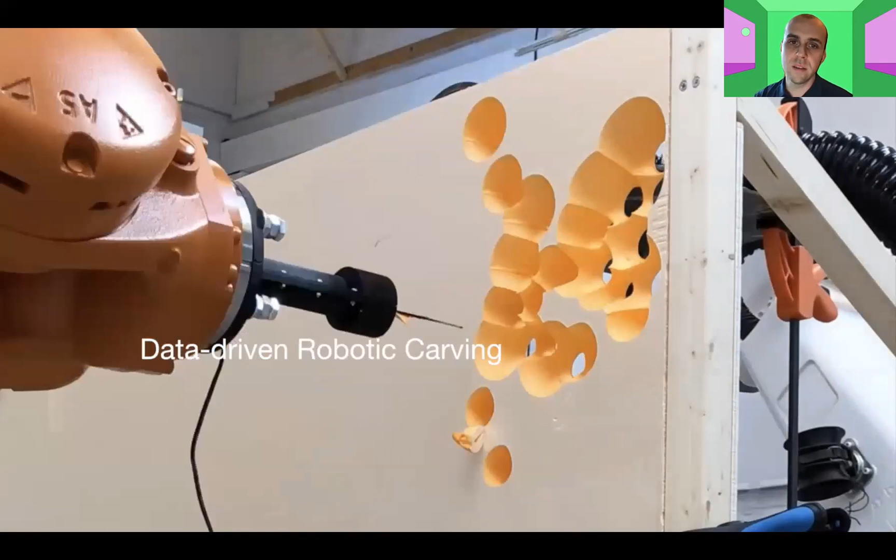This is actually an effort to reduce material in our floor plates, but also to design geometry within, without us having to input that parameter. The robot translates the data and has its own interpretation of it. It's very exciting—we are trying to get to a point where we can test this on a concrete plate, which is also quite amazing.

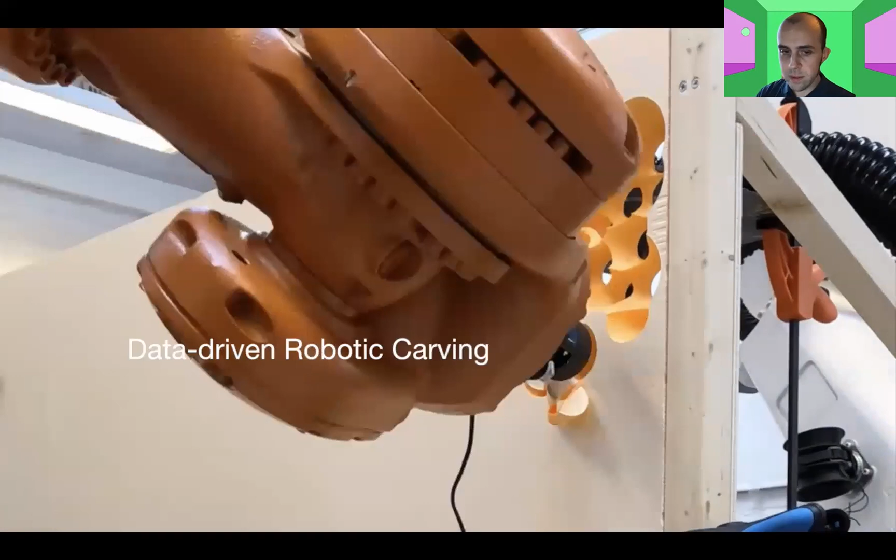This is one of the earlier examples. We just used a foam panel to test the motion of the robot.

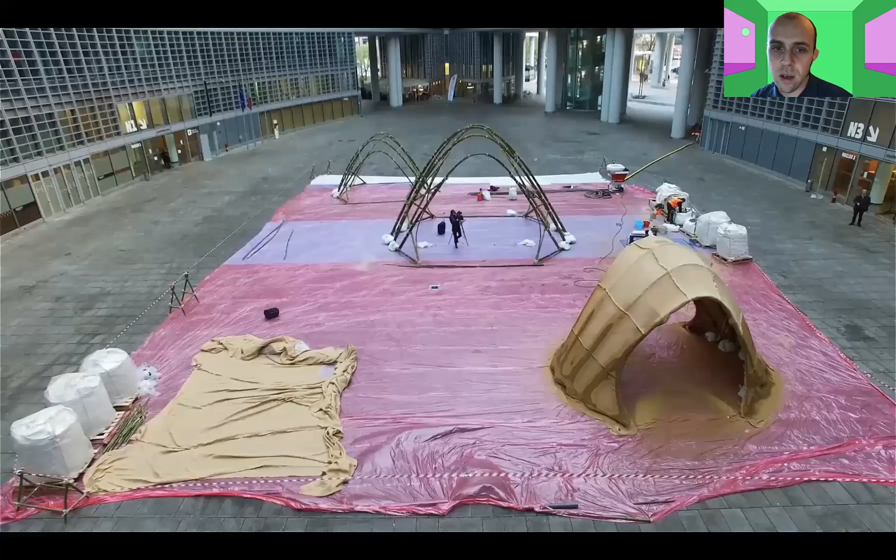Other applications also in terms of accessing large data sets—this is an exercise we did with MOD Architects, looking at drone spraying. The interesting thing here is that the drone positioning and the jet spraying of this composite natural material on top of those shells was controlled by artificial intelligence.

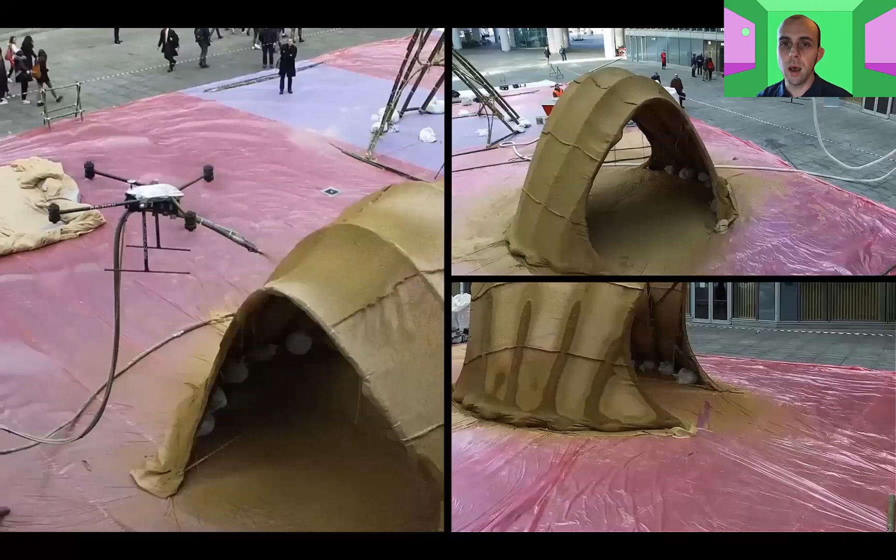The drone is actually reassessing its position every time using a camera, and is then regulating the jet of the actual material on top of the surface to cover the majority of the surface. Very interesting, using a resilient and natural material as well. We did this for the Milan Design Festival last year.

Very quickly, the last example—we had a go at understanding how manipulating data in the real world could be achieved using AR, VR, and mixed realities.

For the London Festival of Architecture last year, we looked at the opportunity of mapping some live data sets on our mobiles to give people the ability of understanding a lot more about the city's hidden boundaries, in order to see if there's a possibility of having a participatory design tool.

In this example, the app would allow users to visualize in real space through their camera, for example, the wind performance around some buildings, how wind is actually affecting our environment, or visualizing air pollution straight from sensors available in London. We mapped air pollution in any part of London, telling people if they were in an area where the actual concentration was dangerous or not.

We also gave users the ability of casting a vote, which we did for fun back then, but also to understand if it's actually possible. We gave people the ability of casting a vote in relation to their location—a positive or negative vote under architecture, public, or environmental criteria.

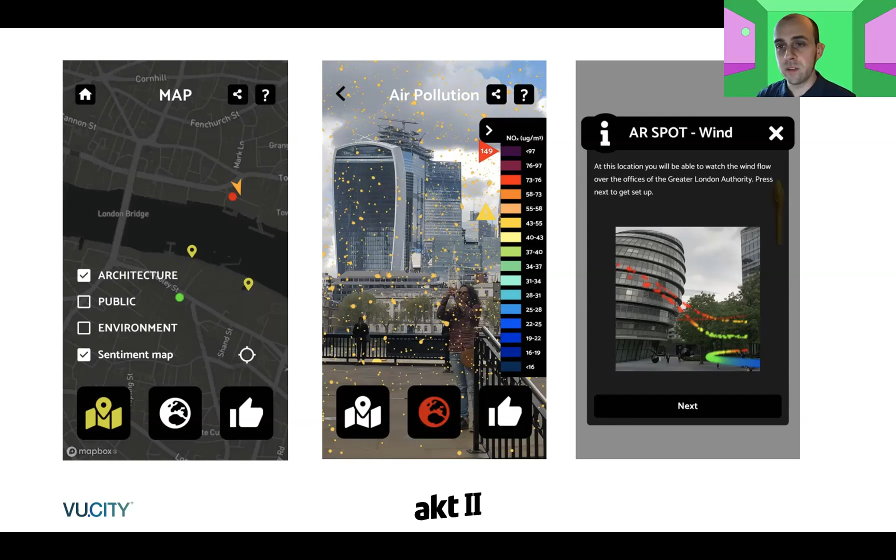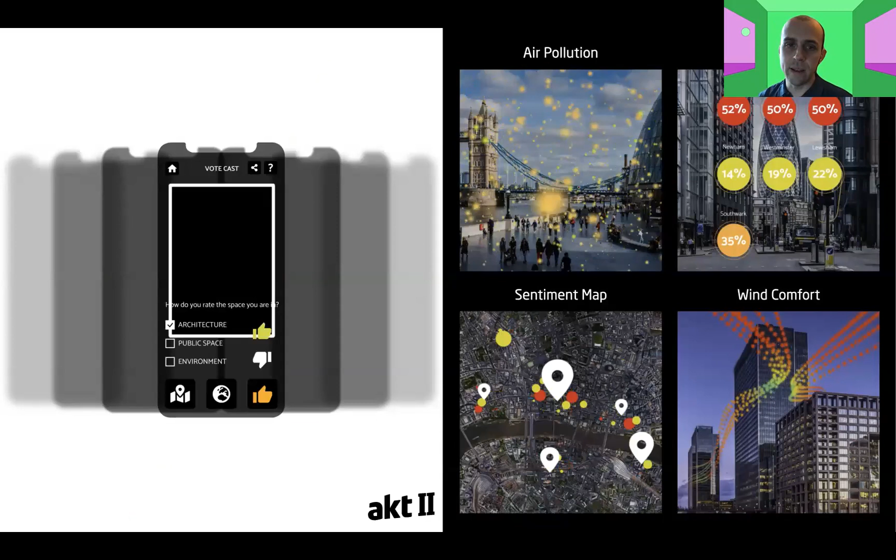We saw a very good response, which is very interesting. We were receiving a lot of data in our servers from users, and this was the first day of launching the app—we started to receive a lot of those votes, which allowed us to see how people perceive our cities and perceive the design, comfort, or constraints of our cities. We thought this was very interesting for using those tools in the future to help us design.

I'll leave it here. I think I hopefully have a few more minutes for questions or a debate.

I'll leave it with a sentence—I was just looking at a YouTube video the other day, and there was a paid advertisement for design masterclasses from Gehry, and he says, if you know what you're going to do in advance, then you won't do it.

So I guess currently in our industry, there are many software companies trying to advocate perfect solutions to optimize designs, but what they really offer are very constrained systems where creativity is hindered. We should really focus a lot more on understanding the spaces and the processing of the data for benefiting our real design, and not letting a predefined solution affect ourselves.